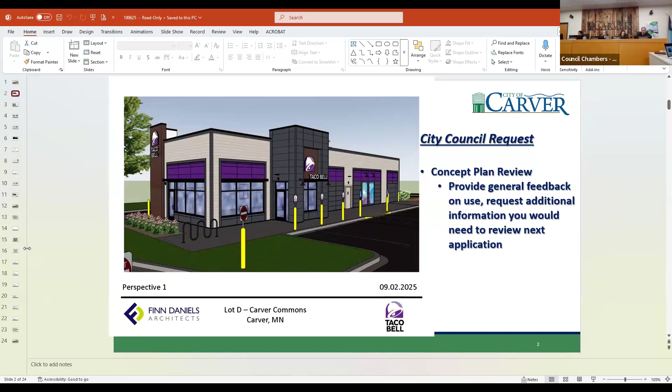We're asking tonight that you provide general feedback, information you'd be looking for the next time you see an application. So if you have a question tonight you'd like to see should they move forward with an additional application, this is your chance to ask, and hopefully we can incorporate it into our plans, or at least our discussion with Taco Bell as we move through the planning process.

Some context of where we're located: we're in Carver Commons, adjacent to Next Step Learning Center, Kwik Trip, Hometown Bank, Mocha Monkey, Les Schwab. You can see on the screen that Taco Bell sits right between the Les Schwab site, currently under construction and looking significantly taller than the building will actually be—so if you drive past and are shocked by its height, know that's not the actual building height—and the Hometown Bank property.

In the Freeway Commercial District, Taco Bell is a permitted use. Just a reminder for folks watching and the City Council, the city does not choose businesses—we zone the property for a type. This site is zoned Freeway Commercial, and Taco Bell is a permitted user in that district. A drive-through is additionally permitted.

We have some language in our code about distance from residential properties, or if there's a street between. This property has Jonathan Carver Parkway, or County Road 11, and the required setback from residential properties. There is platting being requested, so they're not planning to develop the entire outlot as it is today. The entire space north of Kwik Trip and Hometown Bank will be split, leaving about 1.3 developable acres. Taco Bell will take about that same size, with the remaining lot available for future development.

A couple of reminders: the slip right from Jonathan Carver Parkway into the Les Schwab site was under construction this summer, so you're probably familiar with it now. The Taco Bell will be just south of that, with direct access from that slip right into the site, plus additional access from Monroe Drive on another slip right, and the full intersection a bit further west towards Meridian Fields.

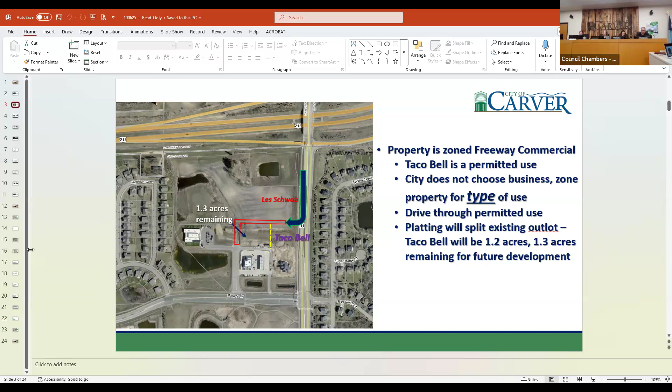Some renderings were included in the packet from the developer. It's a 2,867 square foot building that does meet the required setbacks of the zoning district. They're not currently requesting a planned commercial development overlay, which we sometimes need if someone can't meet a setback or has different requirements from the zoning code—so at this point, that request is not part of the application.

Yeah, for trash—this is my next point. The site plan and plans in the packet include 9 car lengths within the drive-through, with additional overflow into the parking lot. I know that was a concern when we looked at Hometown Bank and Mocha Monkey—what would it look like should drive-through traffic exceed what's allowable, but it overflows into the parking lot, not a private or city street, so it wouldn't impact traffic routing for the remainder of the site. There's interior seating of tables and bar stools for 38 seats, and the trash enclosure is fully integrated into the building.

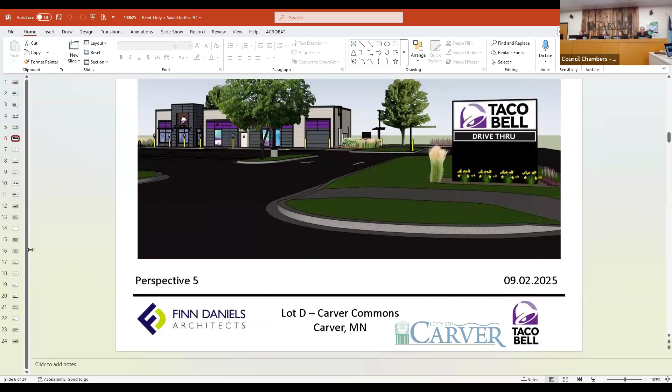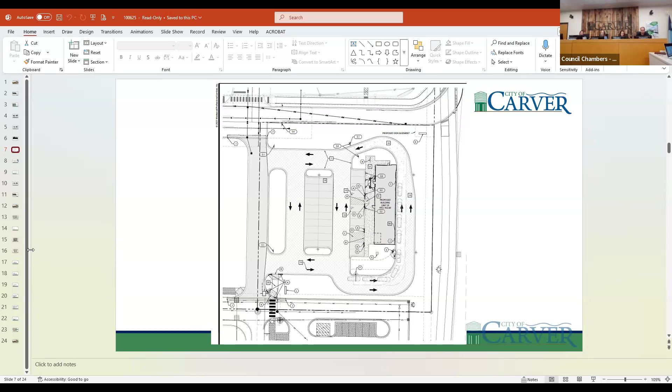For a little bit of orientation, the parking stalls you see on the south are the Hometown Bank Mocha Monkey stalls. You can start to get a feel of where Taco Bell aligns with that project to the south, how it connects into the parking lot - that one-way that goes north-south in front of Hometown Bank extends up past the Taco Bell, connecting beyond Taco Bell into that slip. So you'll start to get a feel for site circulation once you get your bearings, with the Hometown Bank parking lot shown as those stalls on the south side.

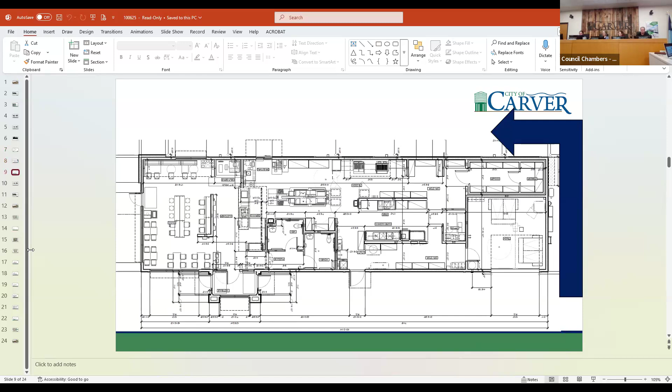Two other things to note and think about: we had someone from the public at the Planning Commission meeting who talked a little bit about dark sky and signage overnight, mentioning some signage in Carver Commons that is bright overnight. That person shared an email with me, and I'll pass it on to Brent to share with the council, just contemplating overnight signage in general. The comments weren't specific to the Taco Bell, but she requested that we think about keeping the dark sky as dark as possible. As part of any application, we get a photometric plan that shows where the lights will be located and where the spill of the lights will be.

Again, just some renderings of the building. I think Shannon is in the back, so I'm going to invite her up to join the conversation - concept plan review, share comments, feedback, things you'd like to see if they move forward with an additional application. Will you introduce yourself when you come up?

My name is Shannon Marcus, and I'm with Marvin Development, and I'm happy to answer any questions. Questions?

So how about hours of operation? Typically our hours are 6 to 7 a.m. to 2 a.m., but it just varies city to city depending on demand. Usually the 2 a.m. close is on weekends, and then midnight to 1 a.m. on weekdays.

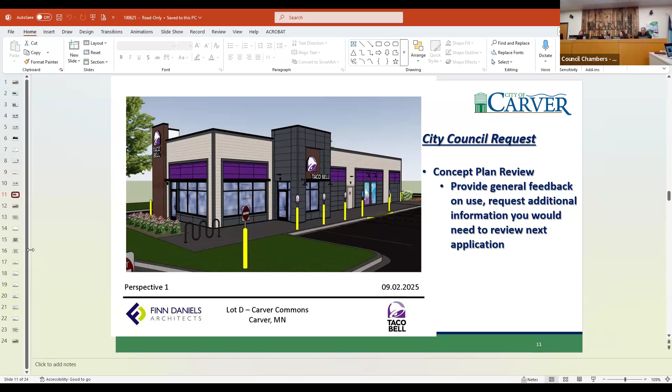I don't have any additional comments, but just to let the council know, the comments that came up were mostly to do with the appearance of the building. There were two big things - there was some concern about the weathered metal. The tower, the Taco Bell tower, is proposed to be of a weathered metal, basically the rusted metal you see on a lot of Taco Bell buildings now, but also on some city projects, like Chaska has some of that in their city projects. There was some concern that it would look aged, dated, worn down, etc.

And the other one was that the way these windows are proposed, it looks very much like industrial doors, and some concern over making this look more like an industrial park than a commercial zone, especially with the Les Schwab next door. And then obviously, as always, purple is a big color, so that got brought up as well. But just so you guys know, those were the big comments that were brought up.

Christy? I'm going to follow up with what Kayla just stated. One of the comments I was going to have is that when we're looking at perspective 2 in the packet, that side of the building really looks like just a bunch of garage doors. So it gives me that same feeling as comments from the planning commission, that we look really industrial, like a bunch of buildings of garage storage.

Now, don't get me wrong, I like the end one, because we're keeping the garbage inside. I think that's great. But as I look down the building and then the Les Schwab, it gives me an appearance of garage doors also. So my question is, I know you have your branding standards, your colors, your certain design standards - is it typical to have an entire side look like garage doors?

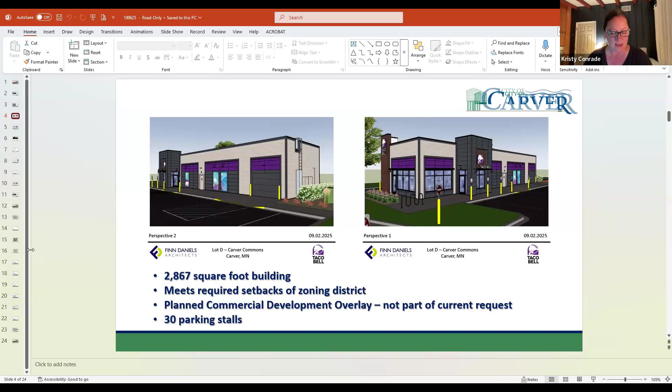I have a question with the light pollution. So if we are looking at having this open and a drive-through open until 2 a.m., and if I'm looking at the topography right, this building is going to sit up higher. So as cars come through that drive-through, what happens when we look east, when those cars are coming into that drive-through at 1 o'clock in the morning or midnight, those headlights are shining across the road into Spring Creek development and into their windows. Can you speak to any remedy? Any thoughts on that? Have we looked at that already?

Yeah, absolutely. In the landscape, you can see on the two corners there's some landscape buffering, if you will. Can you tell me which sheet we're on here? I'm sorry, I can't see you, so I don't know what slide we're on. The slides that are up right now. Oh, okay, wait, there it is. Yep, I did get it now.

And so yeah, that looks like - typically we put up that landscape buffer just to block those headlights, because obviously we want to be a good partner and neighbor. And typically that will suffice, as you turn it'll buffer the headlights. And as we move through the process, we can make sure that corner specifically has a mix of shrubs and arborvitae trees, so they can be blocking day one instead of an overstory tree, which probably won't work since this is higher. We will be thoughtful about what happens on that corner in the landscape plan.

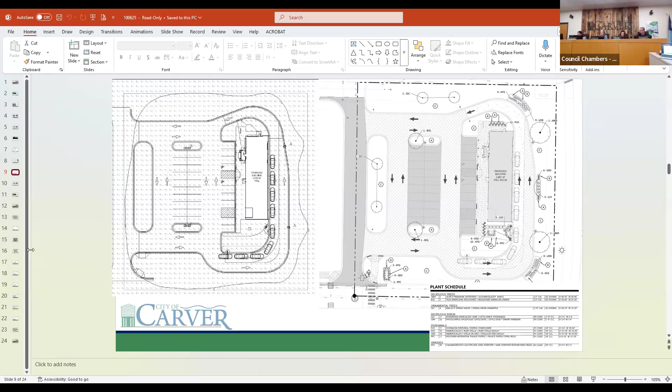I love that the trash is enclosed. I think that's really significant, because sometimes it's really tough to shield those kinds of things. I love the thought that was put into the car queuing, because again I do think you're going to be fairly busy, so I think it's important to plan for an overabundance of vehicle traffic of folks who are trying to get a quick bite to eat in between things.

The questions - and I kind of share some of the same feedback. We had an individual who reached out to me, and I advised him to go to the planning commission meeting with this feedback, just on design elements of trying to incorporate more stone and wood. In our area, the newer Taco Bells that we see are in Waconia and Jordan, and I believe those are a couple versions of building design.

But I think those are a little less purple-forward, which I'd love to see if there's any wiggle room in that. Because again, trying to keep with the architecture of that area with Hometown Bank and Next Steps, it's a little less glaring and more warm colors versus cool colors.

That said, I completely understand you can tell me to pound sand, that you fit all of our requirements for architecture. I appreciate the screening thoughts and the idea to be a good neighbor, and I'm really excited about the jobs this is going to do for our community. So that's it for my comments.

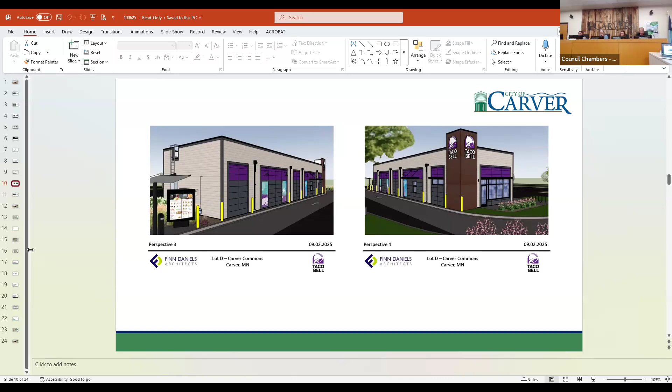Up next, we have the Enclave Residential Development Project, the EAW findings of fact. Ms. Smith: Thank you, Mayor and Council.

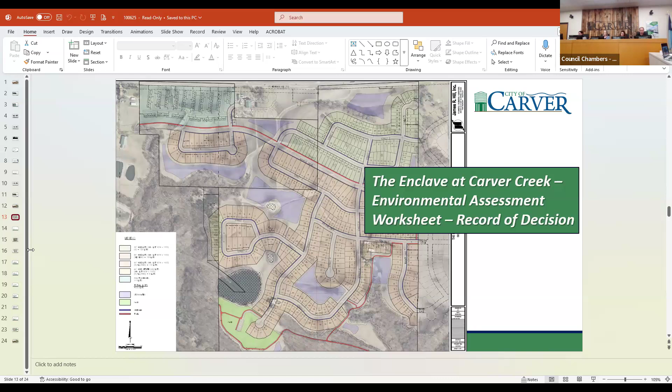Tonight we're reviewing the Environmental Assessment Worksheet, or EAW, for the Enclave at Carver Creek, presented by D.R. Horton. There are members from the EAW team, D.R. Horton, and their engineer in the room too. So if you don't have questions that Aaron and I can answer, they've got a whole team here to answer some questions too.

Some project reminders: it's proposed by D.R. Horton, which has historically built Meridian Fields and Hawthorne Ridge in the city of Carver. The property that the EAW studied is roughly 255 acres. At time of concept plan and the EAW, it's about 530 units, a mix of single family and multifamily townhomes. The comprehensive plan guides the property as residential, both low and high density, which is that mix of single family and townhomes.

As for location, we are west of our current city limits, connecting into the Preserve on the northernmost side, the Brandl Anderson project, and then Timber Creek as you move south with the Lennar project. So this is an area that would need to be annexed into the city of Carver, but it's directly adjacent to two residential projects that are getting pretty close to completion based on building permits and construction that's been happening over the past couple of years in the Preserve and Timber Creek.

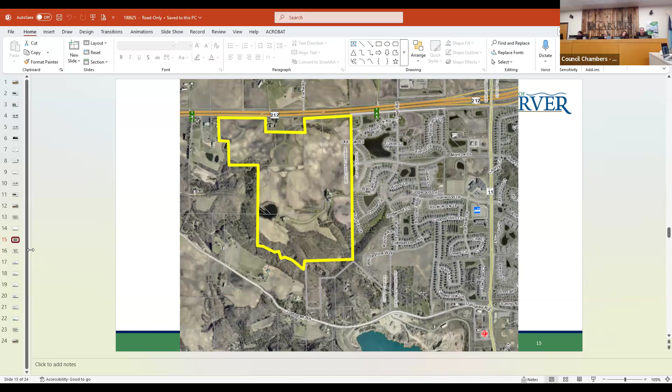This is the general concept showing the 530 units split between a few models that D.R. Horton offers. The orangey color is their more traditional single family. Green on the northeast side is a smaller lot. And on the northwest, where the high density residential is called for in the comp plan, it's the townhome project. So you can see the different types of housing that they're offering in the concept plan for the Enclave.

So what is an environmental assessment worksheet? What are we working on tonight specifically? It's required by Minnesota state statute based on project size.

The most recent one we reviewed was for the United Properties Industrial Project, which triggered it due to the project size of that industrial user. Similarly, the Enclave triggered it by the number of single family units. Depending on how many units, that determines if you need an EAW or not, and it's also based on your community size. The 530 units, under state statute, meant yes, it's required.

What was the rank there, for when you need one? I think it's 350. So it far exceeded the state statute requirement.

So the document that you're reviewing tonight and looking at is not meant to approve or deny a project. It's not you moving through any land use approvals that the city would typically see. This does not grant preliminary plat approval or final plat approval or give a blessing of land use by any means. It's not in current city limits, and those applications aren't contemplated by the council tonight.

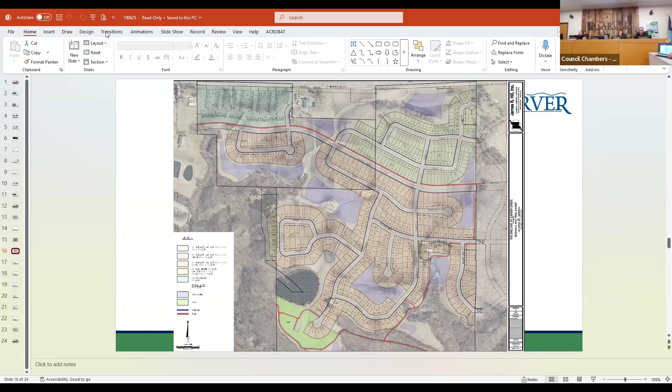Moving on, we're going to talk about the future CSAH 11 and 40 improvements and joint powers agreement.

Good evening, Mayor and Council. Reporting tonight on the joint powers agreement between the city of Carver and Carver County for a corridor study on CSAH 11 and CSAH 40, from 4th Street down to 154th Street in Laketown Township, which is generally adjacent to the future proposed Summergate or Summerfield development in the southwest growth area of the city. As part of that development, it's proposed to ultimately plan on about 1,000 acres of land in the area, which brings anywhere from 4 to 7 or 8,000 potential residential units. That's a very large amount of traffic going onto the local and county systems in this area in the future.

So it goes without saying... Can I ask you a question? You said 48,000 units or people? Units. Times 2.74 is people. You're sure on that? That seems like a lot.

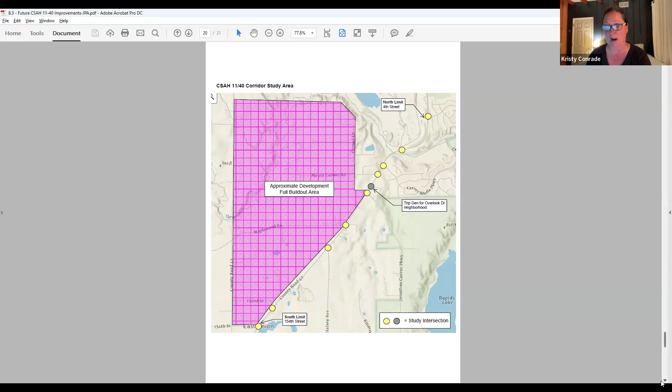So I'm just curious why we're paying for part of the study. Now, don't get me wrong, I don't think the numbers are terrible when we look at the quarter of the cost. But at the same point, why are we on the hook for a county road project that's happening for the county right now, and not the city? We're not establishing something that's in our city limits right now, correct?

So the typical cost participation policy for corridor studies such as this in developing communities is that the cost is split 50-50 between the county and the city. Once you get to an actual project, that would follow the standard county cost participation policy for the construction project, in which that would be based on the amount of land that was actually in the city versus in the township. So that's a different split that would be considered if a project were to move forward. But as far as the study goes, the 50-50 split is a very standard way of approaching this from a funding standpoint.

Okay, so when we talk standard, is this something that's written into an agreement? Because I know the second one you said we've worked with that before, but is this an agreement, or is this kind of like a handshake deal, where we're going to take this, you're going to take that? Every study that I've heard of in the last 5+ years has happened with this typical arrangement. I don't know if it's written anywhere or not, but that's how it's done.

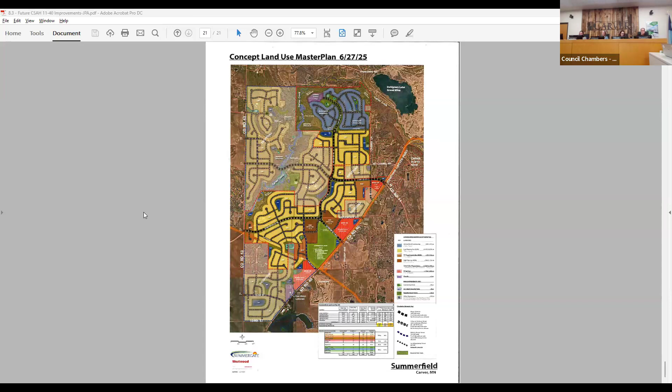It goes well beyond anyone's lifetime, but in order to get a comprehensive view of what's needed and how to assess needs, the county wants to do that. And that's where the 50-50 comes in, frankly.

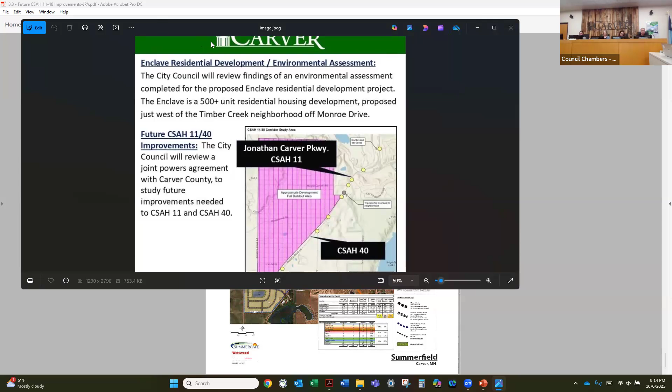The council has the full right to negotiate and say no, we're not going to pay 50-50, but, an opinion only, I would offer that I don't think that would be fair. They're paying 50% of this project essentially is in the city, or will be eventually all will be in the city. I think when you start getting granular as to like what roads are in the township today, I think there's some built-in inequities that you could truly find.

But on the whole, I think we're in really good shape. The county has been a great partner with us on this, but I think we all saw, or at least those who've been around for a while, that Jonathan Carver Parkway north of 4th Street was a challenge until it was redone.

So what you're doing is you're paying for an engineering firm to do some forecasting, traffic modeling, to develop what will continue to be the main vertebrae, if you will, of the city of Carver, and how that will at one point maybe become too full, and what's the strategy for using County Road 40 as a reliever to get from, as folks traverse from 169 - maybe that main corridor for them isn't using County Road 11 and JCP, maybe they continue straight and go through County Road 40.

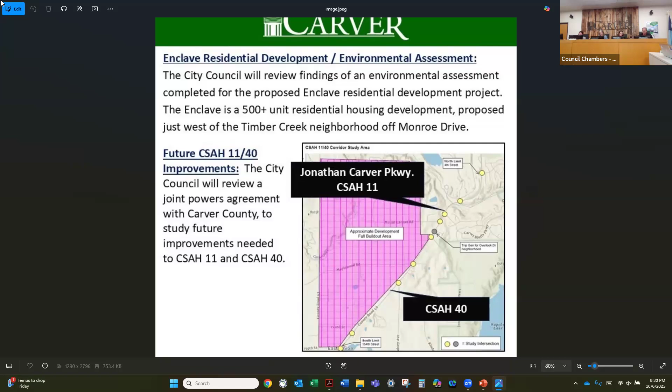All right, thank you. Okay, this is when we're going to circle back to an agenda item we have to skip over from a work session, which would be the city manager's reports.

While we're doing this, let me say, you guys are doing awesome. The technical gremlins tonight have been fierce, and I appreciate, especially you, Brenda, and all of that. Brenda, can you slide that mouse to a different spot?